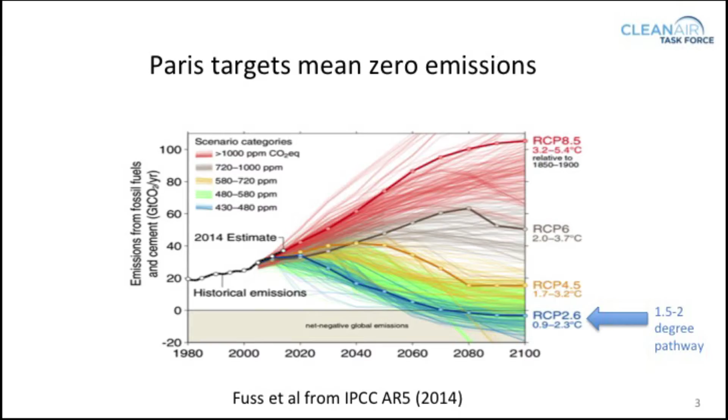You can see it basically glides down to about zero somewhat after mid-century, and that's in that 0.9 to 2.3 degree C range. Now, we all know the models are squishy to some extent, but this is at least the current scientific consensus of the modeling community. So the point here really is that a 50% cut's not going to do it. A 50% cut keeps you at a world that's about 3 degrees warmer. Really, if you're going to manage in that 2 degree parameter, you need to be going down to zero fairly soon.

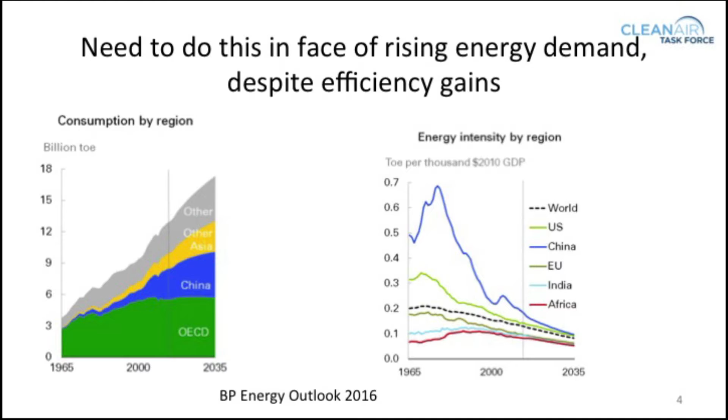Now, you know this already. I'll just recap a couple of key points. So we've got to go to zero at the same time that we are going to be substantially increasing energy consumption. This is from the latest BP Energy Outlook, but you can see from 2016 forward, we're looking at about another 50% increase in demand. This is at the same time that we are actually increasing energy efficiency. So this growth is net of very significant improvements over the next decade in the amount of work we get out of every kilowatt hour.

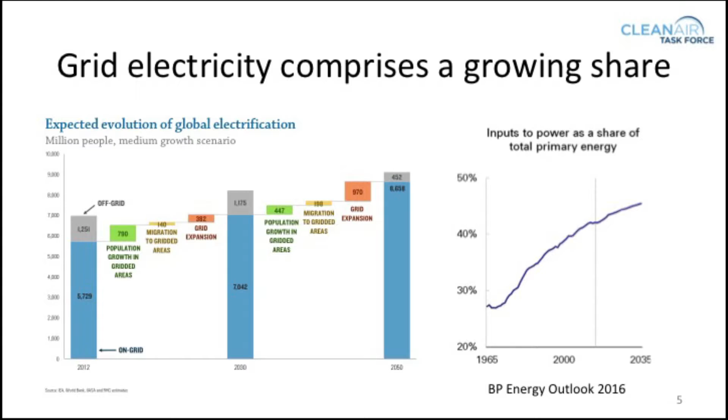There is a notion out there that maybe the developing world will leapfrog the grid and we will have distributed generation that will disrupt the central grid model. We've looked at that question, and our conclusion, it's kind of hard to read here, but this is expected evolution of global electrification. Here's where we are today, where about 80% of households in the world are on grid right now. We've commissioned some work, this is an early look, that suggests that percentage will hold, and in fact, the percentage of world households connected to the grid will actually increase. So between grid coming to the villages and people in the villages moving to cities or peri-urban areas, we expect this to be a very gridded world.

Now, this is the irresistible force and the immovable object, right? We've got to get to zero carbon. At the same time, we've got to grow the energy supply by at least 50% over the next couple decades. The projections for mid-century might be something more like a doubling. So

The common sense wisdom on this would be exemplified by the Intergovernmental Panel on Climate Change's assessment report from 2014 on mitigation. And it's basically an all of the above message. No single mitigation option in the energy supply sector will be sufficient to get to that zero mark. Achieving deep cuts in emissions will require more intensive use of low greenhouse gas technologies such as renewable energy, nuclear energy, and CCS. So this is not the coal industry speaking. This is not the nuclear industry speaking. This is not the renewables industry speaking.

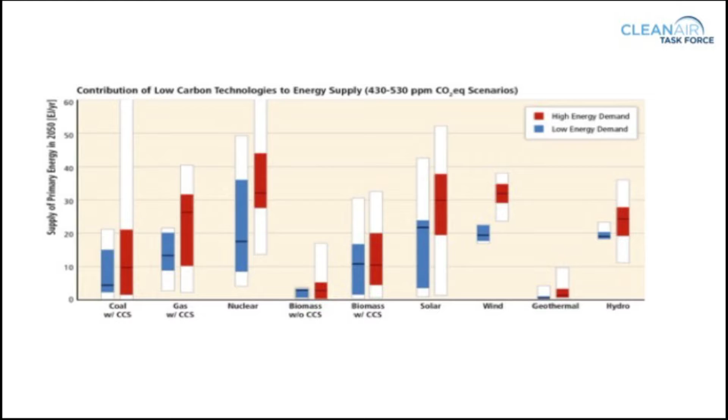These are the folks who sat around for 2 or 3 years and just looked at all the options. And this is a good example of an output from the IPCC. This is sort of a mid-range estimate for a scenario, you might say, for getting to zero over a period of decades. And what's kind of interesting is, again, you see very high solar contributions, very high wind contributions, but gas with CCS and coal with CCS are also very substantial, as well as nuclear. So this is the sort of balanced scenarios that you tend to see coming out of these modeling exercises.

Another example is the United Nations Sustainable Development Solutions Network pulled together the large emitting countries about 2 years ago and looked at these sort of 80% plus carbon reduction scenarios. In this report you can find online, this is each country's team coming back with their 80% reduction scenario.

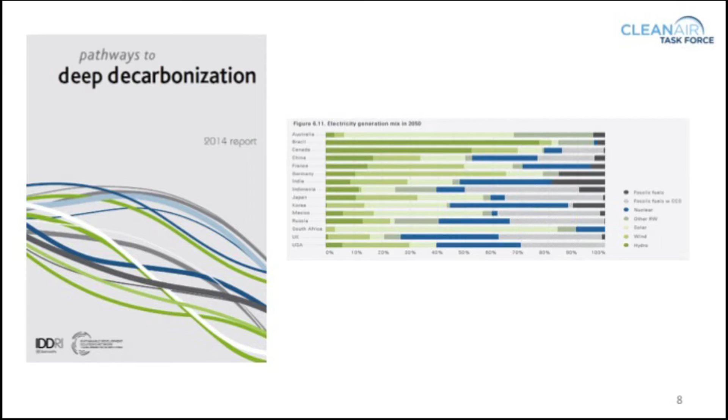And what's kind of interesting is you can see that the gray, this plot is percentage of grid electricity supplied by various sources. The gray here is fossil CCS, and the blue is nuclear. So you can see for most of the countries, nuclear and fossil CCS play a fairly large role. And again, this is the United Nations, where the Framework Convention on Climate Change is nested.

The thrust of this, and I think why I was asked to come speak today, is I think Dave Moeller had seen a talk I'd given on some of the research we've had underway now for a couple of years. And this is going to describe how we got to the conclusions we did and why we worked so hard on the firm energy options.

There is a view out there, and it's not fringe. It's a pretty mainstream view, I think, in the media, that pretty much we can do this zero carbon scenario with weather-dependent renewables like solar and wind. Hydro is sometimes discussed, sometimes biomass is discussed, and we can get into that in the Q&A. But the dominant view on this, I think it would be fair to say, from certainly a lot of my colleagues, is that wind, solar, batteries, and energy efficiency will pretty much get us to zero. And we started poking at that a little bit, being an analytically minded group a couple years ago, and started looking at the studies out there and doing some of our own analysis.

Here are the high-level conclusions, and then I'll do a deeper dive. The first conclusion, one way to summarize this would be high variable renewable energy systems, I'll call them VRE systems, are technically feasible, but they're still going to require significant dispatchable backup capacity, most likely. That dispatchable backup capacity that needs to maintain reliability will add substantially to the cost of decarbonization.

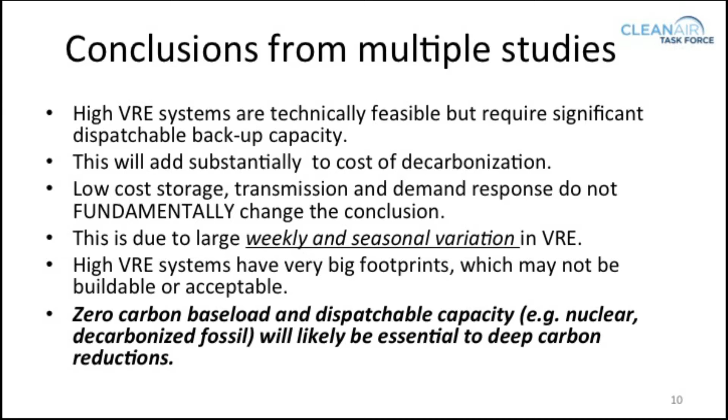High variable renewable energy systems also tend to have very big physical footprints, which may not be buildable or acceptable, and I'll show you some illustrations of that. So the ultimate conclusion is that some kind of zero carbon baseload and dispatchable capacity, nuclear, decarbonized fossil, hamsters in a cage, whatever it is. I'm not going to really be specific about that today. That's the discussion for the rest of the day. But my general point is that something that is dispatchable and can be tuned up and down is going to be really important to the deep carbon reductions that we need.

I'm going to show you some original analysis we did on Germany. Germany, of course, is the iconic example of trying to take this approach of dependency on weather-dependent renewables. So the Energiewende, or the energy turn as it's called, has several elements. The current German policy, first of all, is for an 80% greenhouse gas reduction below 1990 by 2050, 80% renewable electricity by 2050, not all wind and solar, but mostly wind and solar.

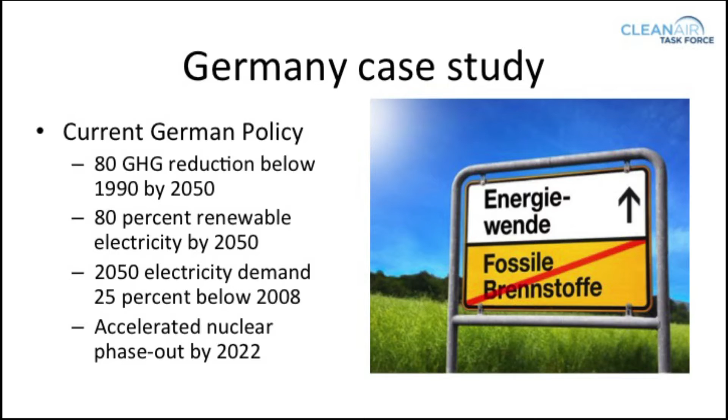They have a certain amount of hydro and biomass on the system now. They want to drop electricity demand 25% over that time period, and then an accelerated nuclear phase out by 2022, which is well underway right now. So we just tried to take a look at what that future looks like. What does the system look like?

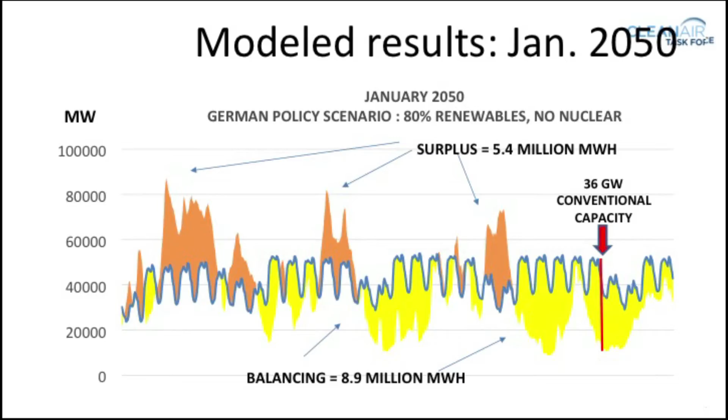And the consequence of that is by the time you get to this point in the month, you need something like 36 gigawatts of conventional capacity to get through the rest of the month. And that's on a peak demand, notice, somewhere in the 50 gigawatt range. So you don't escape the problem. You can have all the storage you want to capture this excess, but it's still not going to fill the deficit. That's one of the better months.

This is the worst month. And of course, if you know electric systems, you know you have to plan for the worst month, right? To make sure that the capacity is there. This is October 2050, when the wind doesn't blow and the sun doesn't shine very much in Germany. And same methodology, daily demand, surplus. You can see the surplus is much sparser that month, and you run out of stored energy much more quickly.

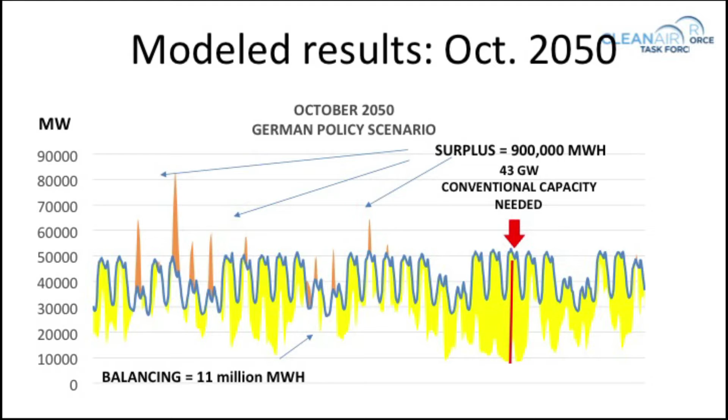So there you have a 900,000 megawatt hour surplus, but an 11 million megawatt hour deficit. So you need something like 43 gigawatts of conventional capacity against a peak demand of 50. So you're really not avoiding the need for that dispatchable capacity. You're running two systems side by side, essentially, and that has obvious cost implications. It also has size implications.

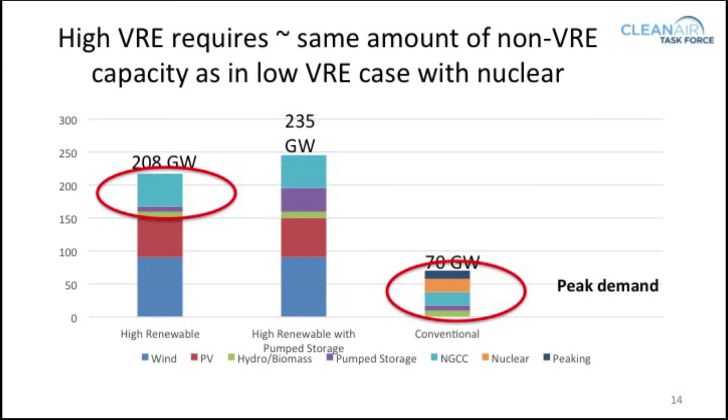One of the interesting things about looking at this case study was that the high renewable 80% scenario has a lot of renewables in it. That's the wind and PV, but it also has a large conventional system. In fact, the conventional system is almost the same size as a conventional system without renewables. So again, this makes the point that you have kind of a shadow system that you have to build to actually keep the lights on.

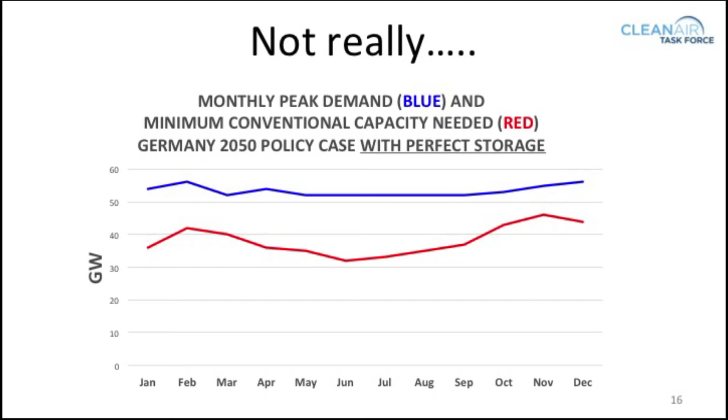And again, German numbers. This is monthly peak demand over the year, and that's in blue. And then that's the amount of capacity you need with perfect storage. So you can see in some months like July, it does kind of make a difference. You've reduced your standby capacity significantly, but again, in months like October, not so much, or February. So the point here is that storage buys you something, and again, this is a lot of storage. We'll get to that in a minute, but it really doesn't displace the need for this firm capacity.

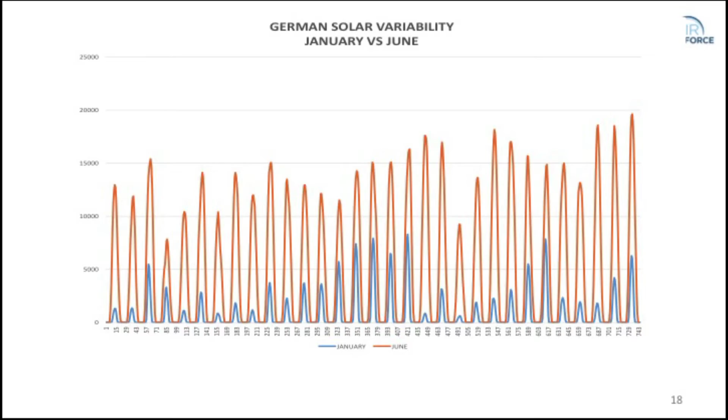Again, the lesson here is storage can help address daily fluctuations, but doesn't solve multi-week and seasonal variation in wind and solar availability. A good example of this is a plot of German solar variability. This is January in blue, and that's June in orange. And this is a monthly sequence. And as you can see, not only in January do you get pretty significant fluctuations, but the inter-seasonal variation is very high, by a factor of something like 3 to 1. So again, it's the bad months that are going to kill you.

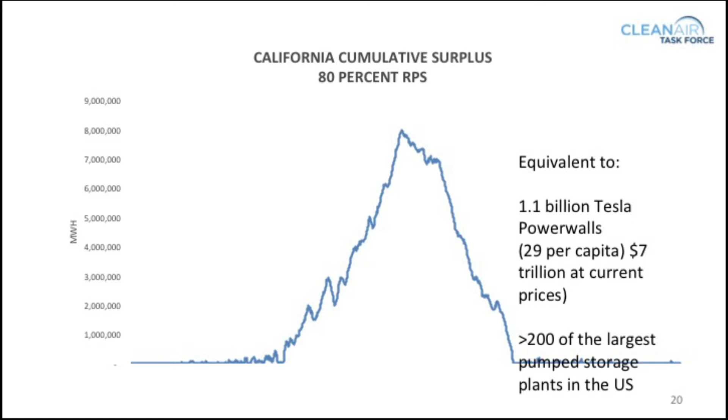So what would it mean to actually deal with that amount of surplus with storage? It would mean something like 1.1 billion Tesla Powerwalls, 29 per capita, so think of that like a household of 4 would have 30 times 4, 120 Tesla Powerwalls. That would be about $7 trillion at current prices. Another way to do this would just be about 200 of the largest pumped storage facilities in the US put in California. We asked one of our hydrologist friends, and he said, well, yeah, if you filled the Central Valley and turned it into pumped hydro, you probably could do this.

I mean, I'm being a little bit critical here of some of these scenarios. I think the point is that you could do this. I mean, you could decide that this is where you wanted to go with this, but is it likely that we're going to make this kind of expenditure and undertake that kind of infrastructure is kind of the question.

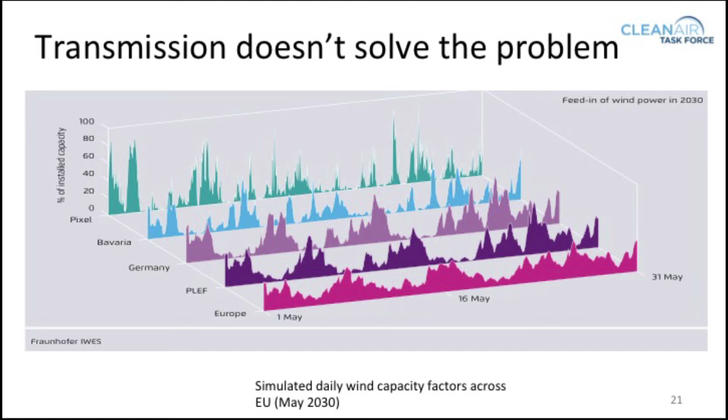Different spatial scales, that's Europe, that's kind of Northwest Europe, that's Germany, that's Bavaria, and then that's, can't remember what that area is, but in any event, what you see is, there's some difference, there is some anti-correlation, but there's a lot of parts of the month where things line up actually pretty substantially. Weather patterns tend to be quite similar over 1,000-mile, 2,000-mile scales.

So the point is transmission can help spread around the risk and the wind, but the wind is not always blowing somewhere. Sometimes the wind is not blowing everywhere. And sometimes that's a matter of days. I mean, you can see these multi-day troughs, for example, that are European-wide.

Demand response is another solution that people look to deal with this level of intermittency. But again, the question comes back, for what period of time? And so the question is, can substantial loads like industrial processes, heating and cooling, or electric vehicle charging be deferred over weeks or months? That's the question. And will major industrial capital investments be made to operate only at low capacity factors, at times when the wind and sun surpluses are available?

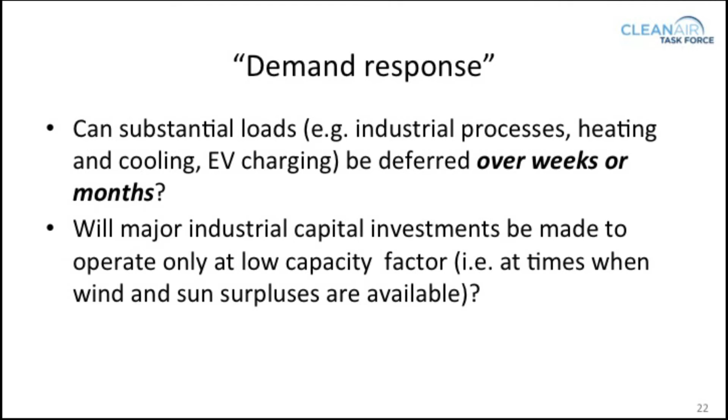So people, for example, hypothesize that we will use off-peak wind production at night to drive electrolysis to create hydrogen, and then we'll put the hydrogen in turbines when we need it, when we have no wind. But again, you've just moved the intermittency problem from the grid over to the electrolysis plant, because the electrolysis plant is going to operate at very low capacity factor. So what do the economics of that begin to look like?

It's a good question. If we look at Pennsylvania, Jersey, Maryland, or it's no longer PJM, I guess, it's much bigger than that. But just as an example, PJM is considered one of the big success stories on demand response. But if you actually look at the average amount of curtailment over this period of time, the average annual total hours curtailed are 14 hours out of 8,760. The average curtailment is 4 times a year. Average duration, 3.5 hours. Average curtailment is about 1% of peak.

So is it really reasonable to extrapolate from those sort of very episodic curtailments to say we can run a system based on backing people off on demand for weeks? It's at least a reasonable question.

So I showed you some of our original analysis. There's a lot of other analyses out there that have very similar conclusions. This is, again, back to the United Nations Sustainable Development Solutions Network, Deep Decarbonization Study of the U.S. What you see here is a sort of a system. They modeled some ideal systems. This is a mixed system with CCS, nuclear, and renewables.

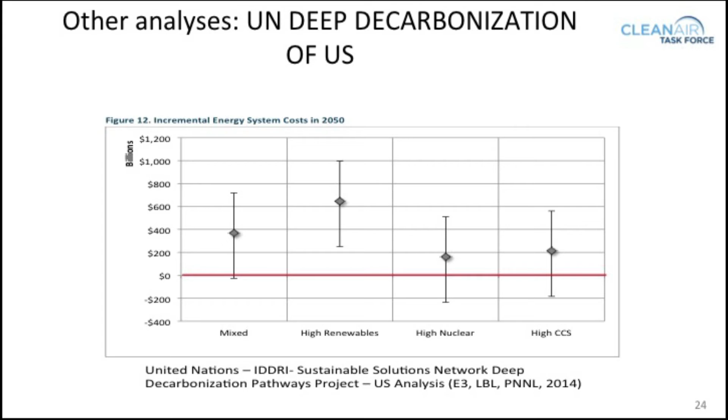This is the high renewables scenario. That's a high nuclear scenario. That's a high CCS scenario. And this is dollars per year to run the system. And you can see that this is the zero line, so you can see that the high renewables system, for the reasons that we've just gone through, which is the need for this redundant capacity, is something like a 50% higher cost than a more balanced system.

Another example, recently the UK Energy Research Partnership looked at this question and came up with basically the same conclusion, even acknowledging the possible contribution of demand-side management, interconnections, and storage to firming up weather-dependent renewables. A deep decarbonization of the grid will need a significant penetration of zero-carbon firm capacity.

So I'm going to conclude by talking a little bit about size of system and plausibility of these systems. This is a paper which has received a lot of attention by Mark Jacobson and his colleagues at Stanford University, 100% clean and renewable wind, water, and sunlight, the 100% renewable scenario. It's gotten a lot of media attention. And it's interesting when you peel back the onion and you say, what does that system look like at 100%?

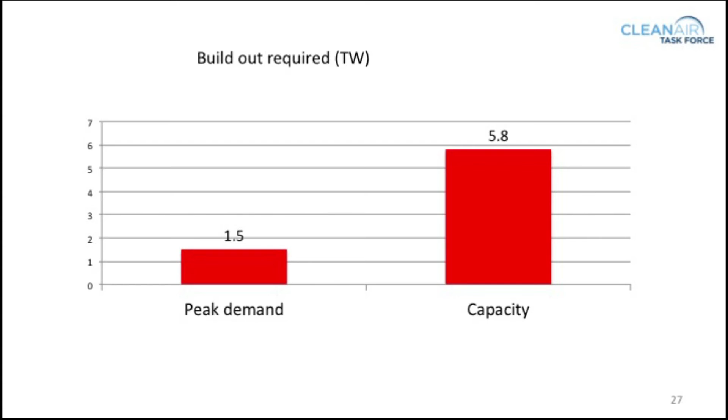So the peak demand for the U.S. in that scenario is about 1.5 terawatts. And the capacity required is about 5.8 terawatts. So again, this gets to the point that you've got to build a lot of low capacity factor capacity, plus you need something else to actually stabilize the system. What does that mean in real terms? So I just took their tables and translated them into units that people might understand.

So we start with 1,670 offshore wind farms, each the size of Cape Wind, or 72 per coastal state. About 50 Tehachapi-sized wind farms onshore for every state, 27 gigawatts of wave machines, which of course none exist today, 227 gigawatts of concentrated solar plants, or if you followed the Ivanpah project in California, that's about 10 Ivanpahs per state, and then another 7 per state just for storage, not for generation.

About 2.3 terawatts of central solar PV. Again, think about scale. The entire U.S. electric system is 1 terawatt. So 2.3 times the current U.S. electric system in central solar PV. Another 469 gigawatts, or 1.5 times the size of the U.S. coal fleet, of solar thermal storage. And then to make the whole system balance, you need an enormous amount of storage, flexible load, in fact, something like 1 terawatt of storage.

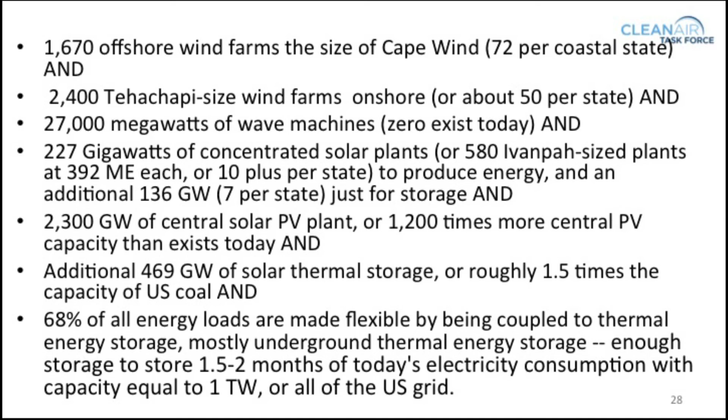So the question isn't, can this be technically accomplished? With enough money and enough engineering, I think you can pretty much do anything. Probably. The question is, do you want to bet the planet that we're going to do this? And I would say probably not.

So just to conclude, and I know we're going to have some discussion this afternoon about how do we move the zero carbon options forward? Because I can't sit here today and tell you that CCS is a widely implemented solution or that advanced nuclear is a widely implemented solution, right? We're stalled on both. So we have a couple of ideas about that to throw into the mix. One is clearly we need aggressive RD&D and early deployment policies to move down the cost curve and improve performance and innovation. Dispatchable renewables, storage, CCS and advanced nuclear are examples.

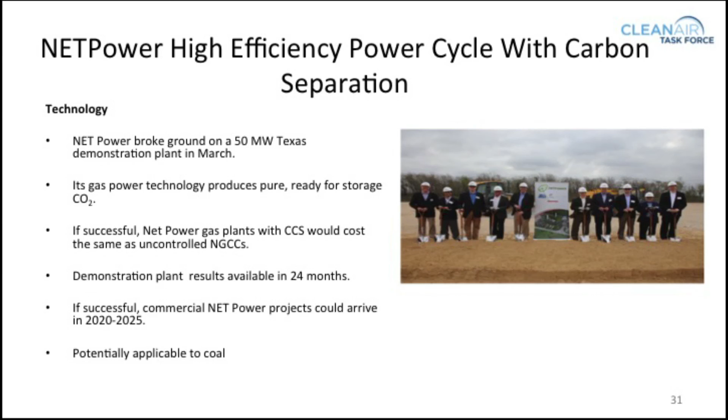A good example of a technology that's interesting is NET Power. For those of you who haven't been following, it's a gas-based technology. It's an advanced power cycle that's highly efficient, that uses CO2 as a working fluid in the turbine, which means you're getting the benefit of having done the separation and compression of the CO2 already. Their claim is that they can do gas power with zero carbon, that is with CCS, at something close to the cost of a conventional gas turbine.

So we'll see. They just did a groundbreaking on their 50 megawatt demonstration in Texas, and we'll see. They believe that this same power cycle is usable for coal. So we're in early days on this.

Second, zero carbon capacity procurement incentives. Something like long-run zero carbon capacity market auctions, incentives for procurement of long-run firm zero carbon capacity at the state or federal level, in generation-regulated jurisdictions where we're still doing resource planning, some kind of procurement adders for capacity and dispatchability value. If we look at places like California, where they're beginning to do special procurements of things like storage, that in principle should be applicable to technologies like CCS, or for that matter, advanced nuclear.

And then finally, making clean energy policies technology neutral. Policies to consider might include allowing nuclear and CCS to participate in state clean energy or RPS programs, and technology neutral federal tax incentives such as the ITC and PTC. And I know we're going to have a longer discussion about that this afternoon.

If you're interested in a deeper dive on some of these principles, we held a workshop last summer. The results of the workshop are summarized at this website, and you can do a deeper dive there.